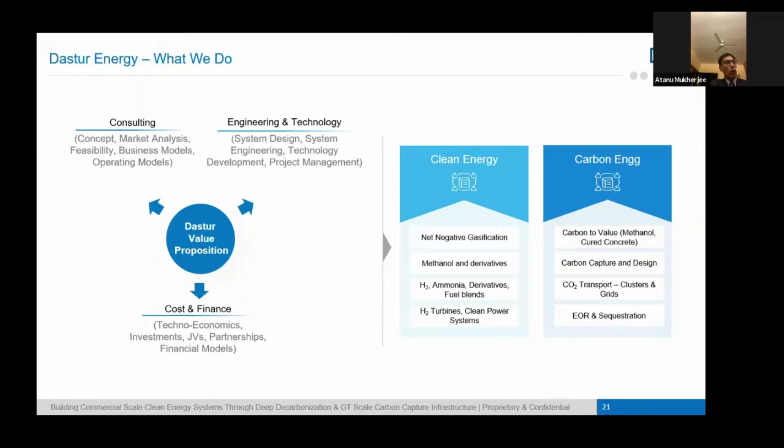A couple of quick projects, these are the major ones that we're working on right now. One is for ADNOC, Abu Dhabi National Oil Company in the Middle East, where it is essentially very large scale conversion of petroleum waste into products, and then taking the CO2 out to generate oil from the fields through a process called enhanced oil recovery.

And this is a fairly large scale carbon capture and gasification project, which is envisioning to capture about 5 million tons of carbon dioxide for injection in the fields, and then of course looking at the derivative in terms of syngas to be utilized for generating hydrogen, generating chemicals like methanol and ammonia, and also power, more of hydrogen heavy IGCC power.

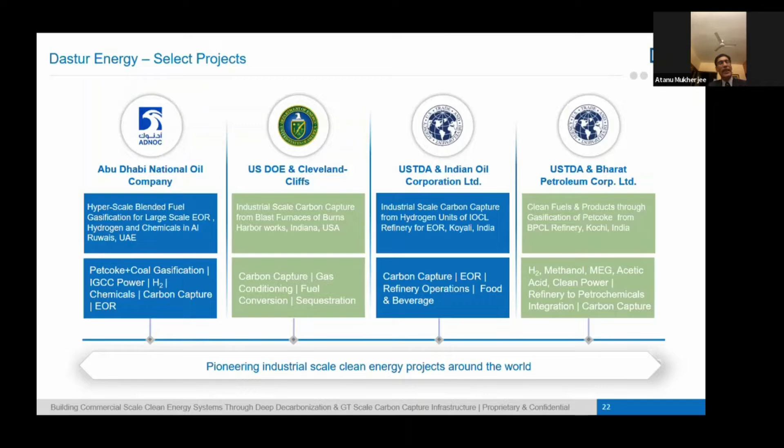I'll move to the next slide and talk a little bit about some of the principles we have learned, right? What we think are useful, devoid of what people might think and conjure about. And so I think the key thing that we think is important is to recognize that CO2 is the main enemy, right? It's not about gas, wind, coal, oil, solar, or nuclear. I think we lose the focus.

And so that gives us a perspective, depending upon the country and the region that you work in, depending upon its state of development, what approach should we take in terms of CO2 abatement, CO2 emissions control, and obviously do it in the most effective manner. And so we need to have a portfolio-based approach towards CO2 abatement, and not get fixated on specific sources of energy. I think that makes us better understand how we approach the problem.

I think like Hans mentioned and Chris mentioned and others mentioned, decarbonizing industrial activity is the key to a net zero world. And I'll tell you why, with some numbers. Given the fact that decarbonizing industrial activity will require some form of feedstock to do the conversions, hydrogen seems to be one of the key carriers which will allow you to do that conversion in terms of industrial decarbonization.

While there have been examples of point-to-point demonstrations and pilots of carbon capture systems in terms of transport, sequestration and carbon capture management, we think we need to talk about scale. We need to implement what we call GT scale, gigaton scale CO2 management infrastructure, and this is something we work on in the Texas Basin. That, I think, is essential for deep decarbonization of the different sectors, industry being one of the key ones.

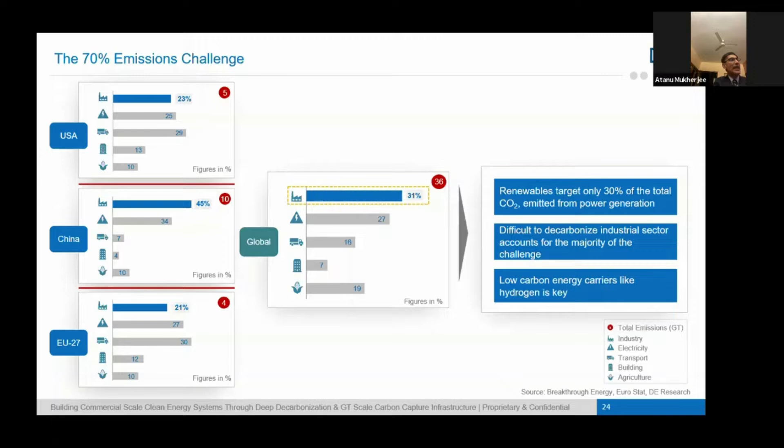Next slide. Now this is just a passing mention of what I talked about. Hydrogen and methanol through natural gas reforming and what we call net negative gasification, which is a combination of different feedstocks including biomass, along with gigaton-scale carbon capture management, are the building blocks for enabling the low carbon industry. That's our fundamental principle in terms of what needs to happen going forward. We see that in different forms in different regions, and we think that's going to proceed further as it gathers momentum. Next slide, please.

And so I think the way to look at decarbonization is from a systems approach, not a specific technology approach, looking at multiple systems across multiple technologies across the entire value chain, along with economics, and the social impact is going to be fundamentally important, right? In terms of creating a broad-based systems approach to a portfolio of options to address the decarbonization challenge. We think clean energy carriers like hydrogen, methanol, ammonia are going to be key. GT-scale carbon capture is going to be key. Reforming and net negative gasification across different parts of the world is going to be key.

Obviously complemented with wind and solar at their accelerated penetration, with some degree of hydro. And hopefully at some point, small modular nuclear in different parts of the world. This is going to take some time to get traction, but we believe that nuclear, at the right cost and the right scale, in a modular manner, is going to make a big difference.

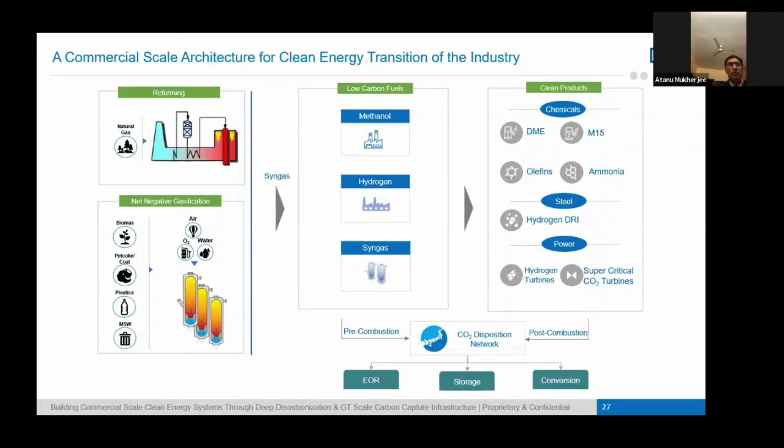And so what is a hydrogen evolution model? How does it look like? I just want to talk a little bit about it. Considerations for what the hydrogen evolution model will look like should hydrogen become a dominant carrier in the different economies from an industrial perspective. We're going to look at comparative emissions intensities, based on some of the studies that have been done by different parties. This is from the Global CCS Institute, in terms of the emission levels in kg of CO2 per kg of H2 across different kinds of production sources.

So you've got SMR-based without CCS, which is at about 9 kgs per kg. You have got SMR with CCS, which comes down to 2 to 3 kgs per kg. If you go to ATR, which is the mechanism we utilize for gas-based H2 conversion, hopefully over time, 90% capture, 94% capture will give you 1-2 kgs of emissions. Coal gasification without CCS is the highest, about 17 kgs per kg of H2. But with CCS, it comes down to 2 to 3 kgs. And again, it may be valid in certain countries, in certain regions.

And if you look at electrolysis today, because you do not have renewable electricity at that scale and that degree, your emissions would be based on grid-based electricity. And grid-based electricity today in the United States, for example, is at about 0.5 tons of emissions per megawatt hour. Europe is probably about 0.3 or so. If you take the US, you're talking about 22 kgs or so, the highest emission, for electrolysis-based hydrogen production because of the grid not being decarbonized completely.

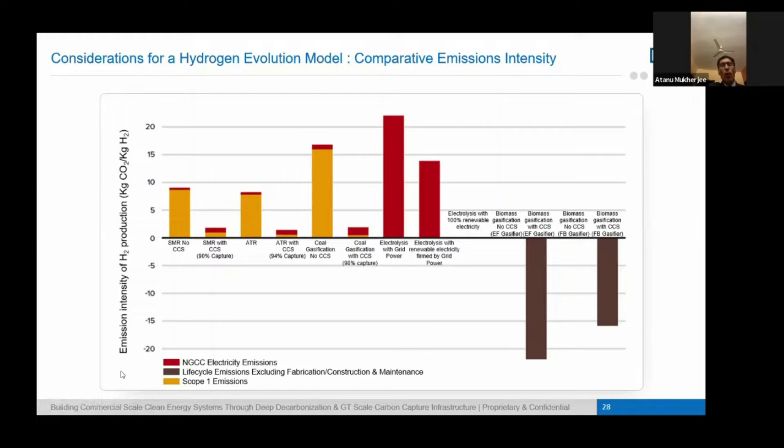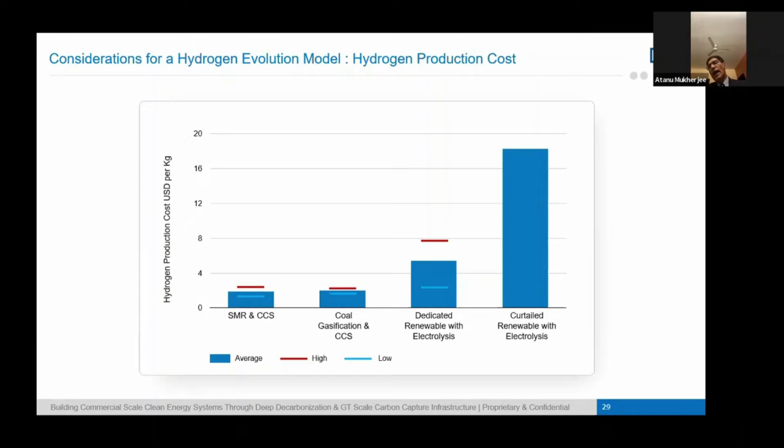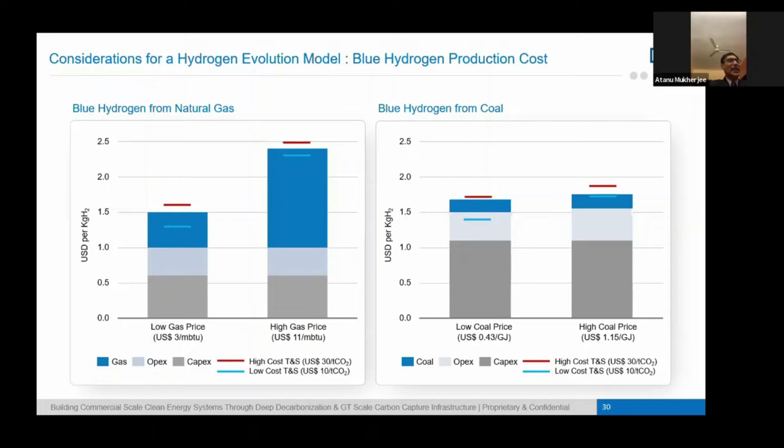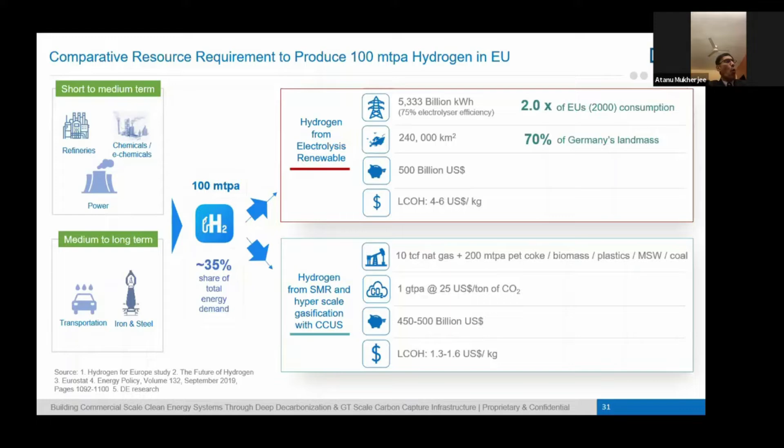$500 billion US. And on the other hand, you got SMR gas-based hydrogen, which will get you at $1.3 to $1.6 per kg. Similar investment. Infrastructure existing already. And so the question then becomes, what path should you follow? So combining costs, resource requirements, emissions, one way to look at it is in the next slide, I think. How will the hydrogen economy evolve?

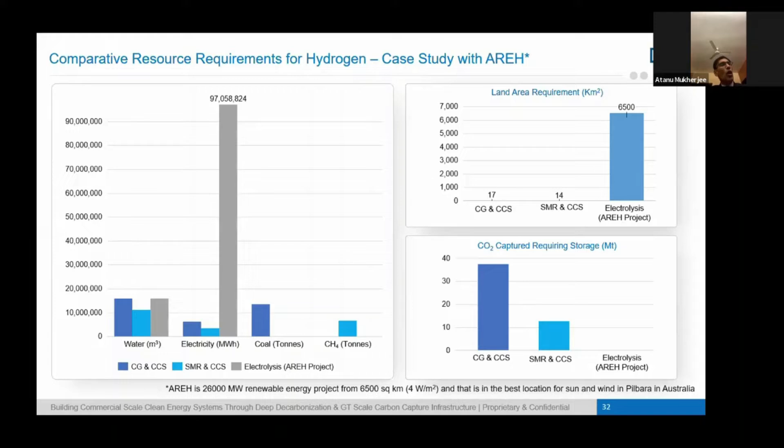And then, can you tap once more, Liliana, if you can, just tap the slide.

And then what happens essentially is that as renewable electricity replaces fossil-fired electricity generation, it generates cheap green baseload from the grid, that drives green hydrogen, which then competes with blue hydrogen, giving you on the right the right combination of blue and green at the right cost structure. So I think this is the model that is probably going to evolve over time, and makes more sense to create a hydrogen market at scale across different economies and different regions.

The next slide. And then there's this whole question that people are talking about. Atanu? Yes? Two more minutes. Two minutes? Okay.

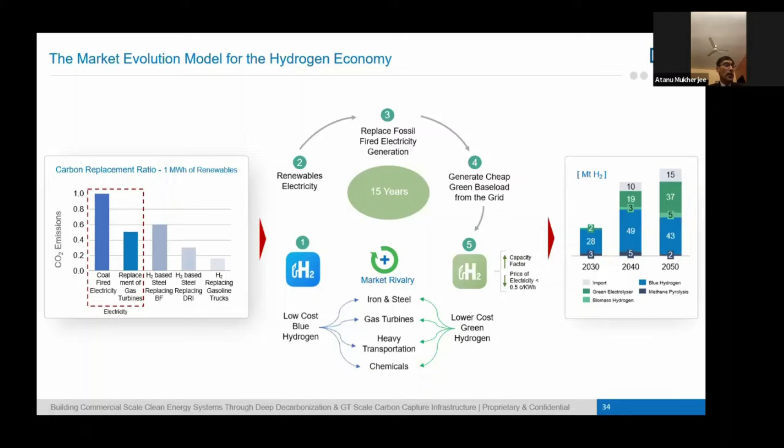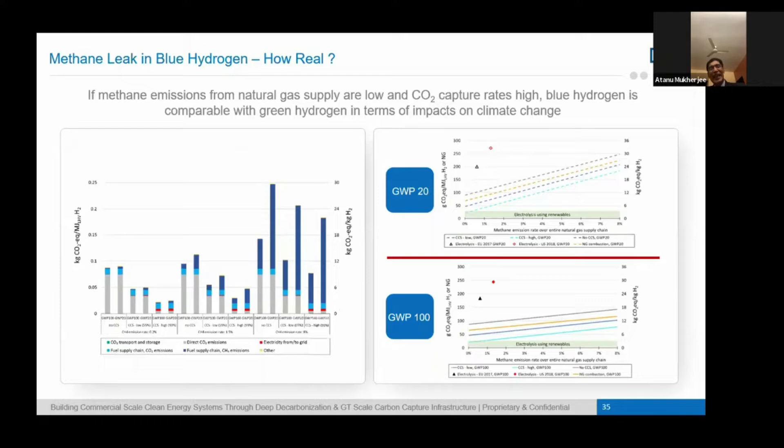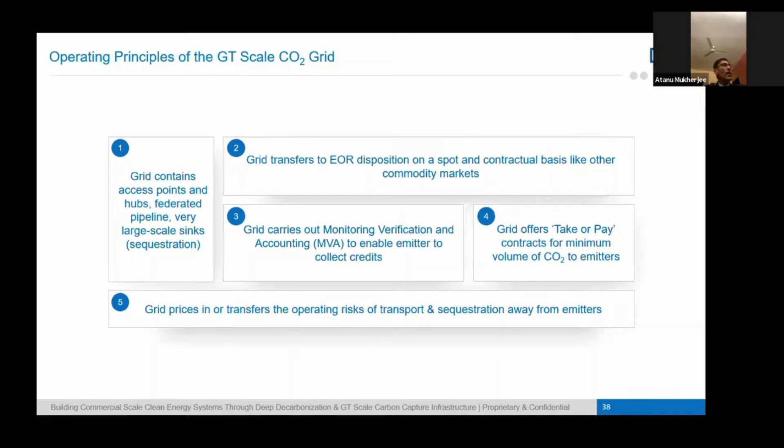And finally, next slide, and the next slide. Next slide, please. Yeah, previous one.

Quick one. This is again the same thing: how do you design it across larger regions? There are models on international trade that we use to not only store and sequester CO2 in one place, but also transport and trade it across different regions, depending upon the competitive advantage of CO2 in different regions. So there are a lot of factors that come into a model like this.

We think anchoring large-scale H2 projects based on gas-based or fossil fuel-based hydrogen is important to drive this kind of CO2 network. So I think that CO2 commodity infrastructure, along with hydrogen in the way that we think it's going to develop, is probably going to be a model for development of hydrogen at scale for markets around the world, including Europe, I would imagine.